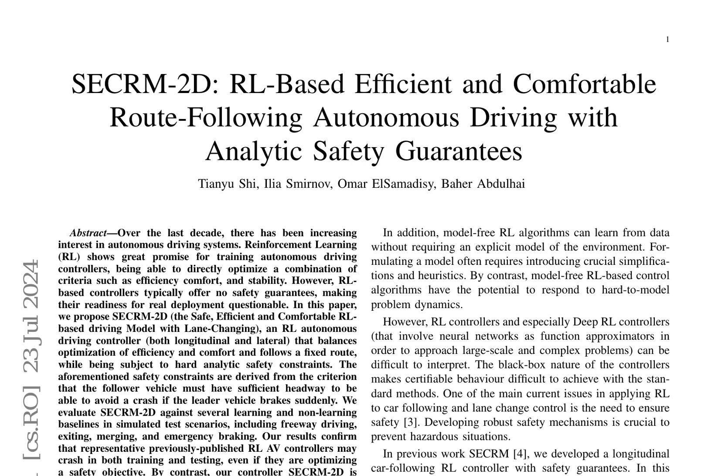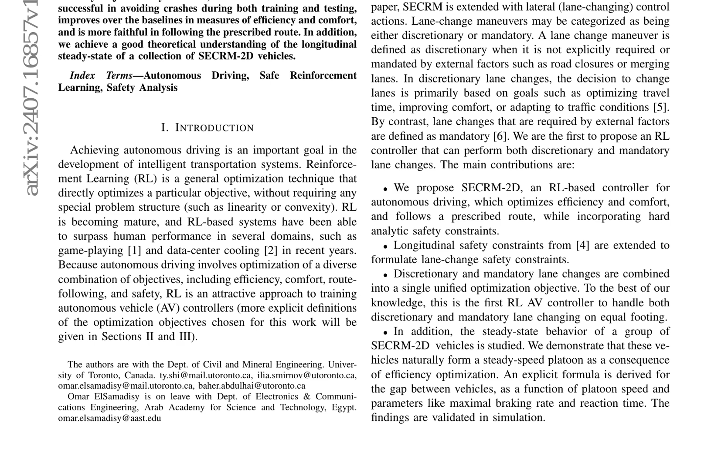Evaluations against several baselines in simulated scenarios confirm SECRM-2D's success in avoiding crashes, improving efficiency and comfort, and faithfully following the prescribed route. Furthermore, the study provides a theoretical understanding of the longitudinal steady-state behavior of a collection of SECRM-2D vehicles, demonstrating their ability to naturally form a steady-speed platoon. This advancement has significant implications for the development of safe and efficient autonomous vehicle systems.

Advancing the application of reinforcement learning to train performant autonomous vehicle controllers, this work incorporates strong, explainable, and explicit safety constraints. Existing research on lane change topics is reviewed, highlighting limitations in addressing safety issues.

The problem formulation involves training a controller for a single vehicle driving on a road with one or multiple lanes, acting in discrete time steps to set both continuous longitudinal acceleration and discrete lateral movement. The controlled vehicle obtains a fixed route from an independent routing module and performs discretionary and mandatory lane changes.

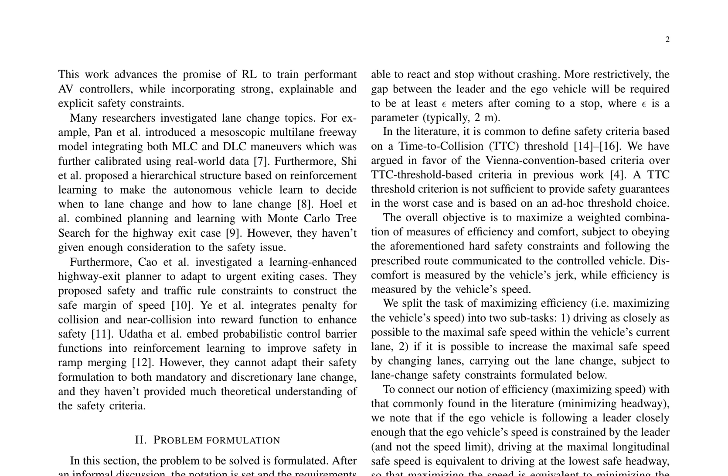Hard safety constraints, derived from the Vienna Convention on Road Traffic, ensure a minimum gap between the vehicle and its leader vehicle to prevent collisions. These constraints provide stronger safety guarantees compared to time-to-collision threshold-based criteria.

The objective is to maximize a weighted combination of efficiency and comfort measures, subject to obeying safety constraints and following the prescribed route. Efficiency is measured by the vehicle's speed, while discomfort is measured by the vehicle's jerk.

The task of maximizing efficiency is split into two subtasks: driving as closely as possible to the maximal safe speed within the current lane, and carrying out lane changes to increase the maximal safe speed, subject to lane change safety constraints. Notation is introduced, including the ego vehicle, leader and follower vehicles, distances, and acceleration and deceleration rates.

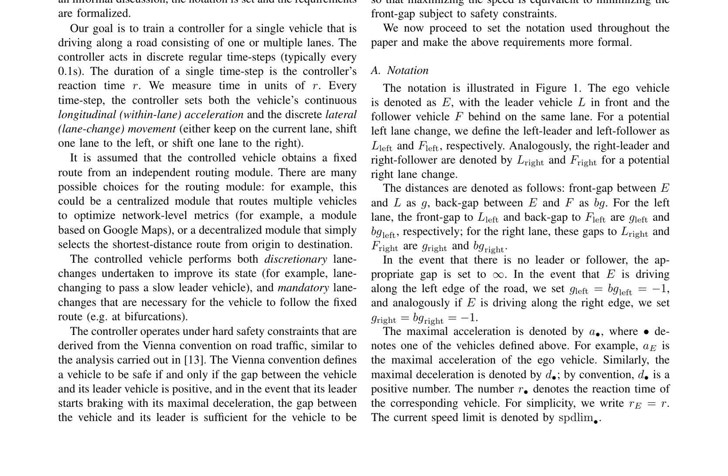The requirements and notation are formalized to provide a solid foundation for the remainder of the paper. The longitudinal safety constraint is formulated based on the ego vehicle's reaction time, minimal stopped gap, and speed, ensuring a safe front gap in the event of an emergency stop by the leader. This constraint is derived using the laws of kinematics, resulting in equation 1.

To avoid negative values, the defensive principle is adopted, assuming the ego vehicle's deceleration is less than or equal to the leader vehicle's deceleration. This leads to the ego vehicle's maximal safe speed at the next time step, given by equation 2. Similar expressions are derived for imaginary copies of the ego vehicle shifted one lane to the left or right, resulting in analogous expressions for maximal safe speeds.

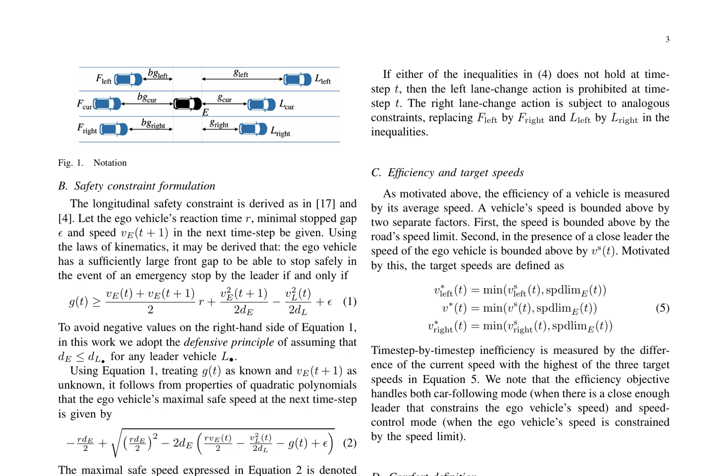The safety constraints for the SECRM-2D model are formulated, including the acceleration safety constraint, where the ego vehicle's speed must satisfy equation 3, and the lane change safety constraints, which prohibit lane changes that would violate the safe gap inequality. The lane change safety constraints are elaborated for a left lane change, resulting in two conditions given by equation 4.

The efficiency of a vehicle is measured by its average speed, which is bounded above by the road speed limit and the maximal safe speed. The target speeds are defined as the minimum of the maximal safe speed and the speed limit, given by equation 5. The inefficiency is measured by the difference between the current speed and the highest target speed.

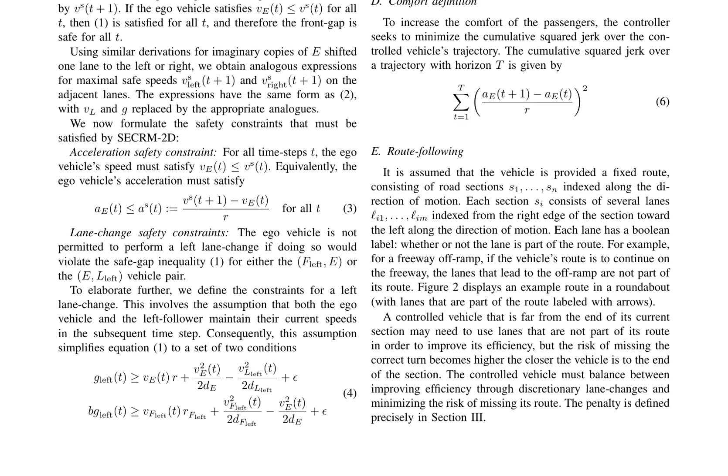The comfort of the passengers is increased by minimizing the cumulative squared jerk over the controlled vehicle's trajectory, given by equation 6. The authors formalize the control problem as an optimization problem within a statewise constrained Markov decision process, SCMDP.

Specifically, they define an SCMDP as a tuple consisting of the state space S, action space A, reward model R(S,A,S), transition model P(S,S,A), discount factor gamma, initial state distribution ρ(S), cost function C, and weights W.

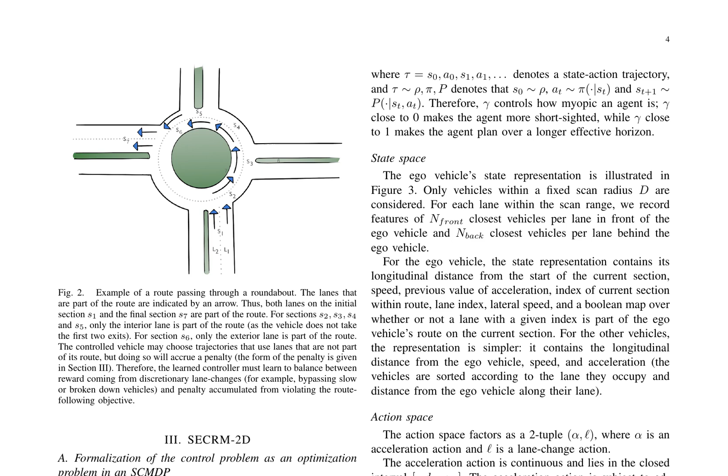The agent's objective is to find a feasible policy that maximizes the cumulative discounted reward J(pi) equals E, tau tilde rho pi, of the sum from t=0 to infinity of gamma^t times r(s_t, a_t), s_t+1.

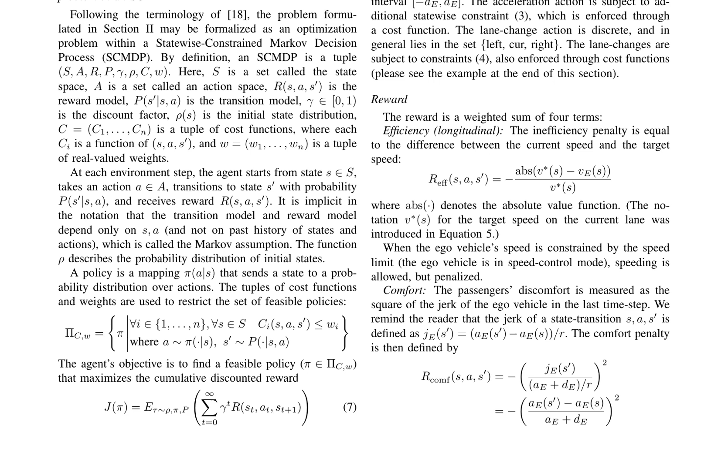The state space includes features of the ego vehicle and other vehicles within a fixed scan radius, while the action space is a two-tuple, alpha and L, where alpha is an acceleration action and L is a lane change action. The reward function is a weighted sum of efficiency, comfort, route following, and discretionary lane changes.

The state representation of the ego vehicle, as depicted in Figure 3, includes the ego vehicle and surrounding vehicles.

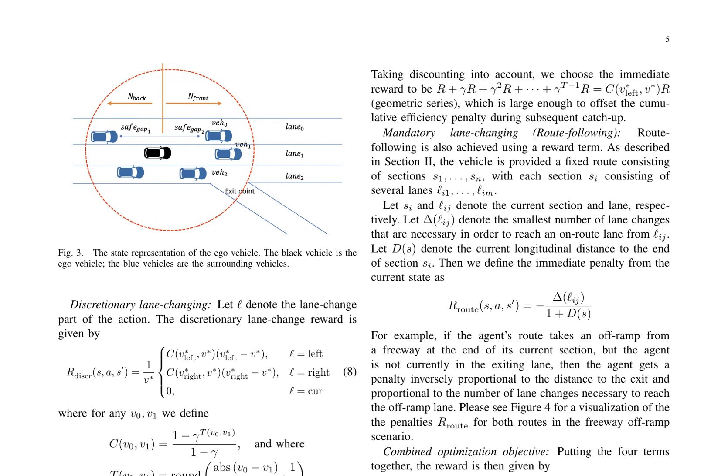A discretionary lane-changing reward is formulated to encourage changing to a lane with a higher target speed, penalizing changes to a lane with lower speed. This target speed maximization approach compactly encodes actions for various scenarios, including those with faster-moving leaders or no leaders on adjacent lanes. The immediate reward is boosted to compensate for the penalty accrued after the lane change.

Mandatory lane changing, or route following, is achieved through a reward term that penalizes deviations from the fixed route. The combined optimization objective integrates these terms with weights for comfort, discretionary lane changing, and route following. This unified approach optimizes both discretionary and mandatory lane change decisions, a novel contribution in the application of deep reinforcement learning to autonomous driving.

The Deep Deterministic Policy Gradient (DDPG) algorithm is employed to train the controller, where actions are encoded as pairs. The first component corresponds to acceleration, while the second corresponds to lane changes. To ensure safety, the acceleration action is constrained, and the lane change action is projected onto the available lane change space.

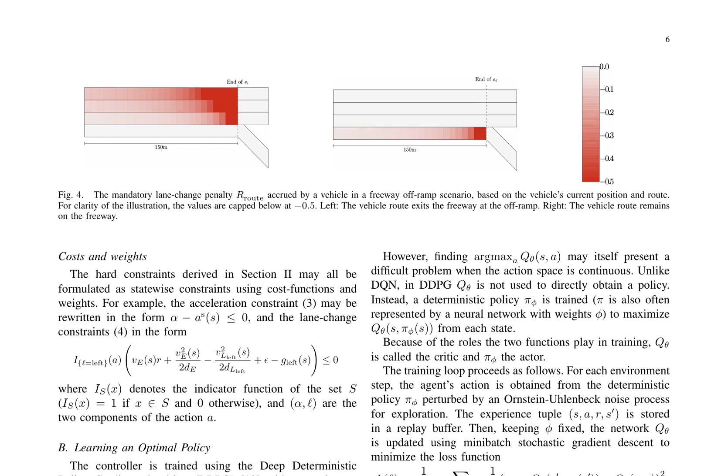The DDPG algorithm learns an optimal policy by iteratively updating the state action value function and the policy network. This process involves storing experiences in a replay buffer and updating the networks using mini-batch stochastic gradient descent. Target networks are utilized to enhance training stability.

Figure 5 illustrates the setup, demonstrating how the reinforcement learning vehicle determines acceleration and lane changes based on the current traffic environment. The RL vehicle's decision-making process is informed by its learned policy, which is the result of the DDPG algorithm's optimization of the state action value function and policy network.

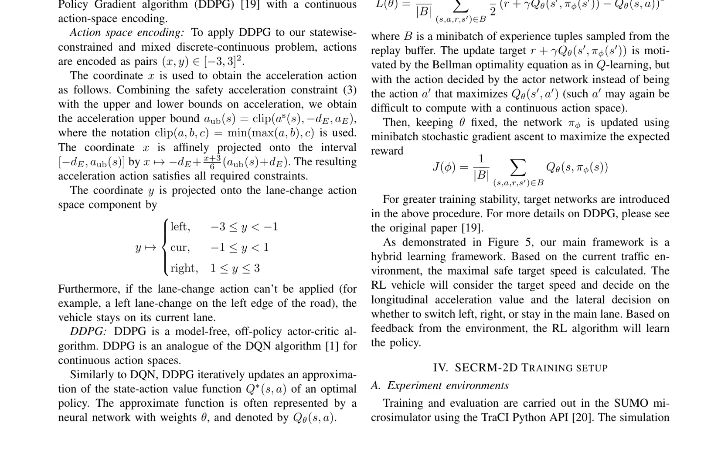This study evaluates the efficiency, comfort, and safety of an autonomous vehicle control algorithm in mixed traffic scenarios using deep deterministic policy gradients (DDPG). The algorithm optimizes vehicle control while enforcing constraints through action constraints rather than a safety term in the reward function.

Two environments are used: a simple loop network and a real-world network based on the Queen Elizabeth Way (QEW) and Erin Mills Parkway, Southdown Road interchange near Toronto, Canada. In both environments, the controlled vehicle learns to navigate through mixed traffic, optimizing efficiency, comfort, and discretionary lane changes while adhering to safety constraints.

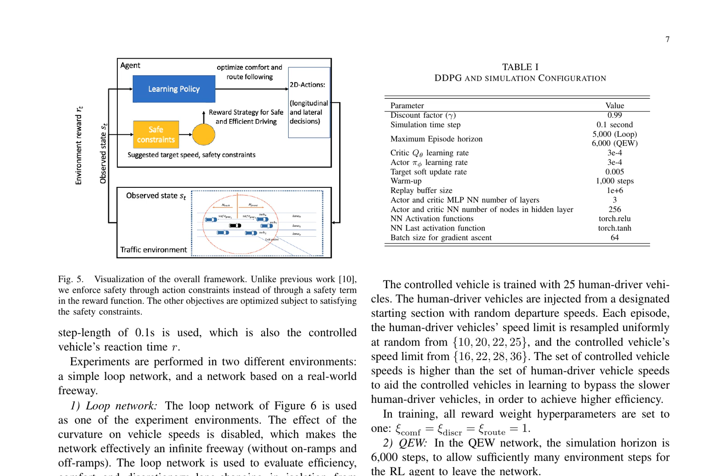In the loop network, the controlled vehicle is trained with 25 human driver vehicles, each with randomly sampled speed limits, to learn how to bypass slower vehicles and achieve higher efficiency. In the QEW network, uncontrolled vehicles are generated at a fixed inflow rate, and the controlled vehicle has two possible routes: staying on the freeway or taking the off-ramp, with each route assigned randomly with equal probability.

The DDPG model configuration consists of a discount factor of 0.99, a simulation time step of 0.1 seconds, and a replay buffer size of 1 million. The model features 3 layers of neural networks with 256 nodes in the hidden layers, and the actor and critic learning rates are set to 3e-4.

Target soft update rate is 0.005, and a batch size of 64 is used for gradient ascent. The model's activation functions are torch ReLU for the hidden layers and torch TANH for the last activation function.

Training was run for 1,000 episodes for each of the 5 randomly sampled seeds, and the checkpoint achieving the highest cumulative reward across the 5 seeds was selected for evaluation.

Figure 9 illustrates the convergence of efficiency and comfort rewards during training in the QEW network, displaying average values and 1 standard deviation across the 5 training runs.

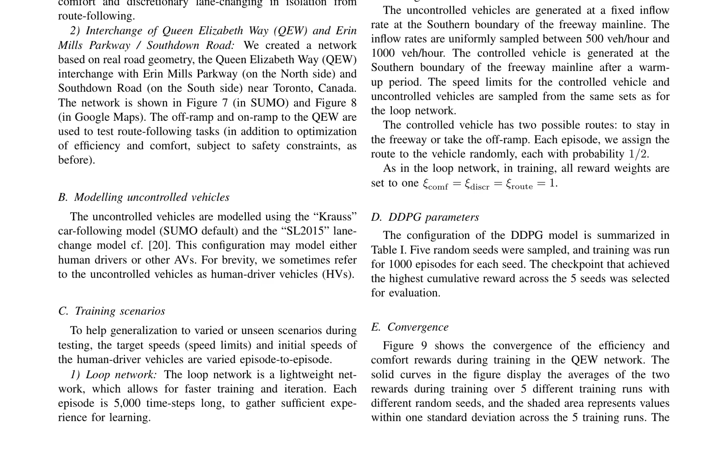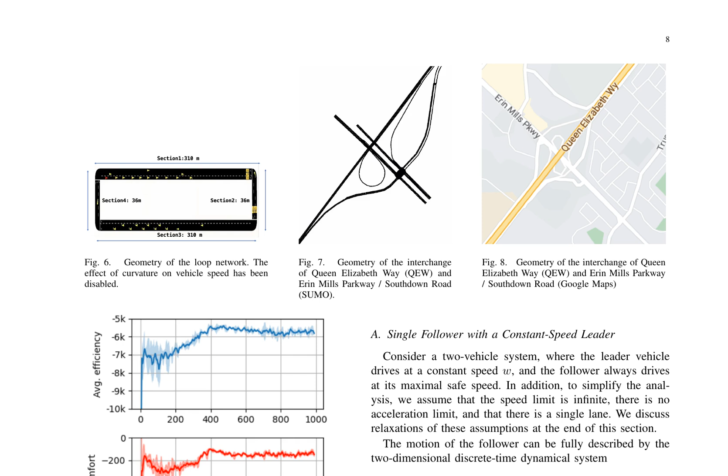This is evident from the analysis of the trained policy, where efficiency and comfort rewards converge during training, depicted in Fig. 9. In the long term, the longitudinal behavior of a collection of vehicles shows the formation of platoons at the same speed as the lead vehicle.

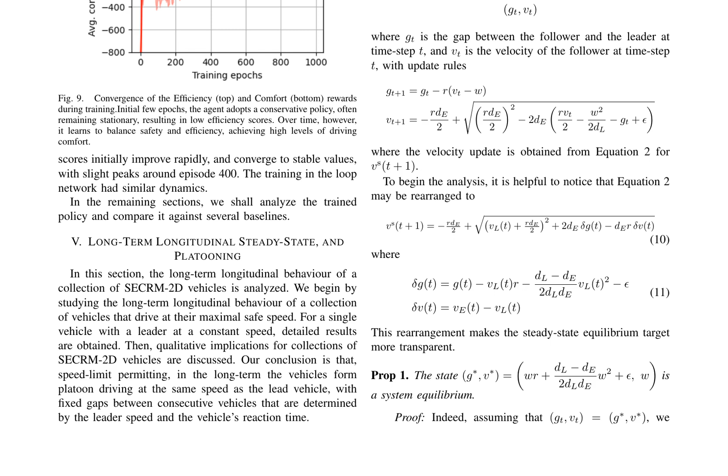The paper analyzes the asymptotic stability of the equilibrium point in a system where a follower vehicle is trying to catch up to a leader vehicle. The update functions for the follower's velocity and gap are provided, and the Jacobian matrix is computed at the equilibrium point. The eigenvalues of the Jacobian are shown to have norm less than 1 when the parameter W is greater than 0.

This indicates asymptotic stability. In the case where W is equal to 0, the eigenvalues are complex and have norm 1, making it impossible to conclude whether the equilibrium point is stable or not. However, empirical results suggest that the behavior is similar to the W greater than 0 case.

The paper then discusses how removing simplifying assumptions, such as bounded maximal acceleration in speed limits, affects the analysis. It is shown that with these assumptions removed, the follower may need an initial speedup period to catch up to the leader, and the analysis reduces to the previous case.

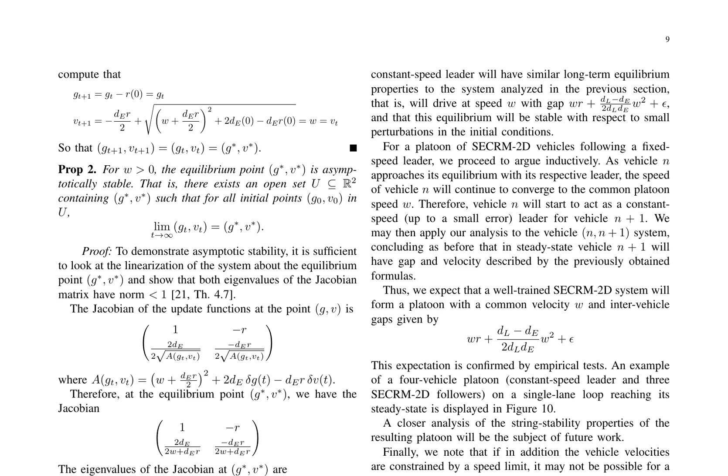The paper then moves on to discuss the implications of the analysis for SECRM-2D platoon formation. It is argued that a well-trained SECRM-2D model following a constant speed leader will have similar long-term equilibrium properties to the system analyzed, with the follower driving at speed W and maintaining a gap of WR plus DL minus DE over 2DLDE W2 plus epsilon.

For a platoon of SECRM-2D vehicles following a fixed-speed leader, it is argued inductively that each vehicle will converge to the common platoon speed W, and the intervehicle gaps will be described by the previously obtained formulas. Empirical tests confirm this expectation.

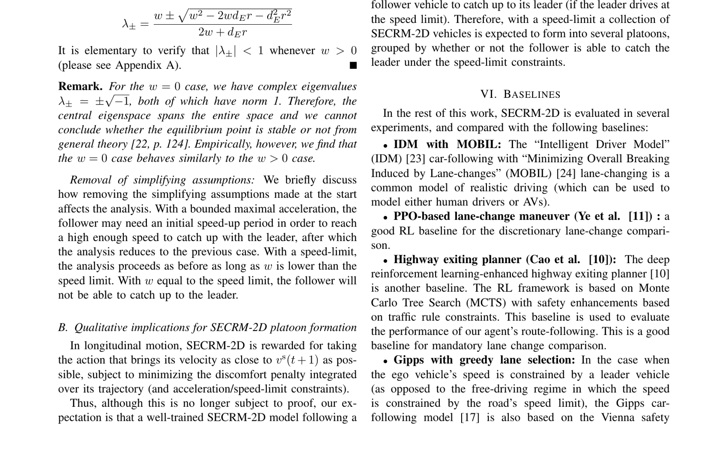Finally, the paper notes that if vehicle velocities are constrained by a speed limit, it may not be possible for a follower vehicle to catch up to its leader, and a collection of SECRM-2D vehicles may form into several platoons. The paper concludes by outlining the baselines used to evaluate the performance of SECRM-2D in subsequent experiments.

The authors evaluate the SECRM-2D controller in a loop network under 3 scenarios: normal driving, congested traffic, and emergency braking. Performance is compared to 3 baselines: IDM plus MOBIL, Gipps plus greedy, and PPO-based reinforcement learning.

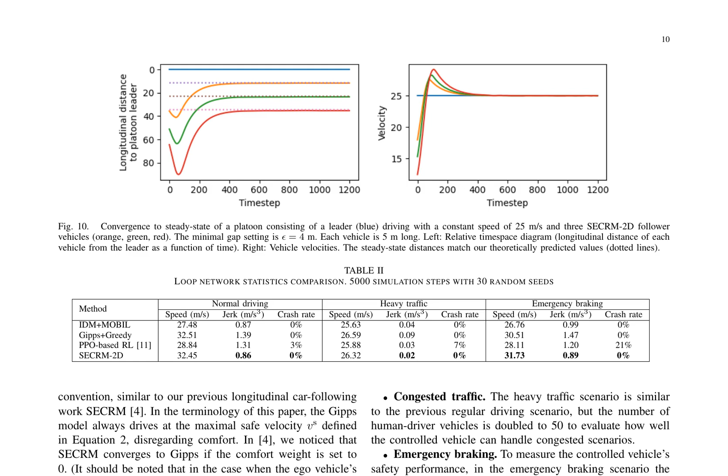In the congested traffic scenario, the differences between methods are minimal due to the high number of vehicles. The emergency braking scenario demonstrates SECRM-2D's ability to generalize well and maintain safety under unexpected events.

The Gipps model is extended with a lane-changing model, resulting in Gipps plus greedy, which prioritizes efficiency over comfort. The authors conjecture that SECRM-2D converges to Gipps plus greedy as the comfort weight Xi-comf approaches 0, suggesting SECRM-2D can be seen as a more comfortable version of Gipps plus greedy.

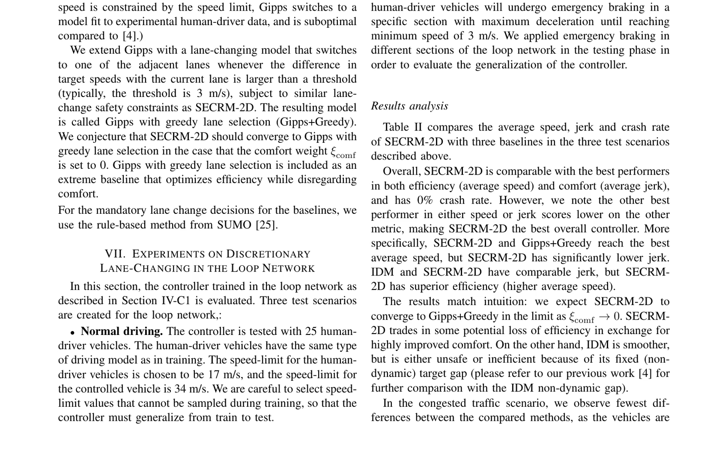This highlights SECRM-2D's ability to balance efficiency and comfort, making it a promising approach for autonomous vehicle control. The SECRM-2D vehicle's performance is evaluated in various scenarios within the QEW network, including bypassing, emergency braking, and merging tasks.

In the bypassing scenario, the controlled vehicle navigates through a zigzag fleet of human-driven vehicles with a lower speed limit, demonstrating its ability to conduct safe, efficient, and comfortable lane changes.

In the emergency braking scenario, the controlled vehicle must brake to avoid collisions when encountering sudden deceleration from leading human-driven vehicles.

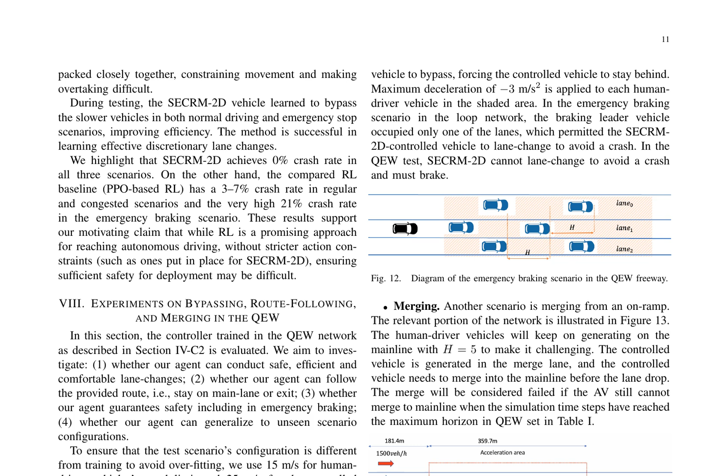The merging scenario tests the vehicle's capacity to merge into the main line from an on-ramp under challenging conditions. The results of these experiments are analyzed and compared to two baseline models, IDM plus MOBIL and Gipps plus greedy.

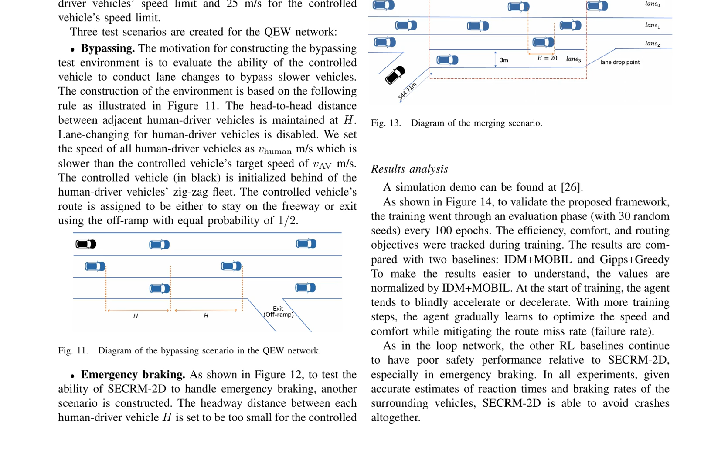Over the course of training, the SECRM-2D agent improves its efficiency, comfort, and routing objectives while reducing the route miss rate. Unlike other RL baselines, SECRM-2D achieves a zero crash rate in all scenarios, particularly in emergency braking, thanks to accurate estimates of reaction times and braking rates of surrounding vehicles.

The SECRM-2D model, a safe, efficient, and comfortable reinforcement learning-based driving model with lane-changing capabilities, was tested in various scenarios to evaluate its performance. In the bypassing scenario, SECRM-2D generalizes well, achieving higher average speed, lower jerk, and better safety and route following performance compared to rule-based and RL-based controllers.

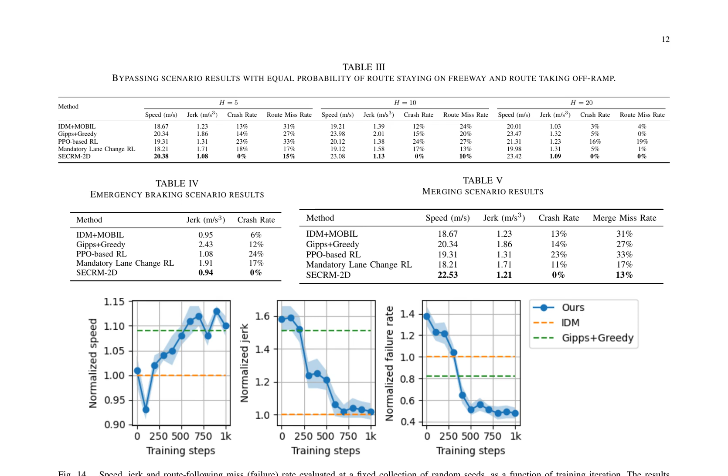As the headway decreases, travel efficiency decreases, demonstrating its adaptability in different traffic conditions. In the emergency braking scenario, SECRM-2D maintains low average jerk and zero crash rate, showcasing its superior safety performance.

The merging scenario results, obtained without retraining the controller, illustrate the model's ability to generalize to different route-following scenarios successfully. The efficiency and comfort of the model depend on the reaction times of the controlled and human driver vehicles in

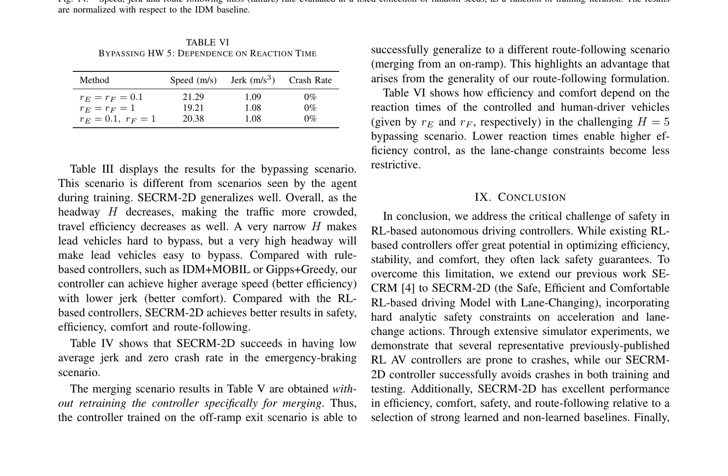the challenging bypassing scenario, with lower reaction times enabling higher efficiency control. The SECRM-2D controller successfully avoids crashes in both training and testing, outperforming several representative previously published RLAV controllers.

In the realm of microscopic traffic simulation, car-following models play a vital role in replicating real-world traffic conditions. However, existing models often fall short in capturing the complexities of vehicle behavior, particularly when it comes to lane changes.

To address this limitation, we propose the SECRM-2D model, which integrates both mandatory and discretionary lane changes using deep reinforcement learning. By leveraging a two-dimensional state space, SECRM-2D can accurately capture the dynamics between vehicle speed and intervehicle gaps, providing a more realistic representation of traffic conditions.

The SECRM-2D model's development is rooted in the concept of deep reinforcement learning, allowing for the optimization of vehicle control strategies through trial and error. We evaluate the model's performance using the SUMO microscopic traffic simulator and compare it to other state-of-the-art models.

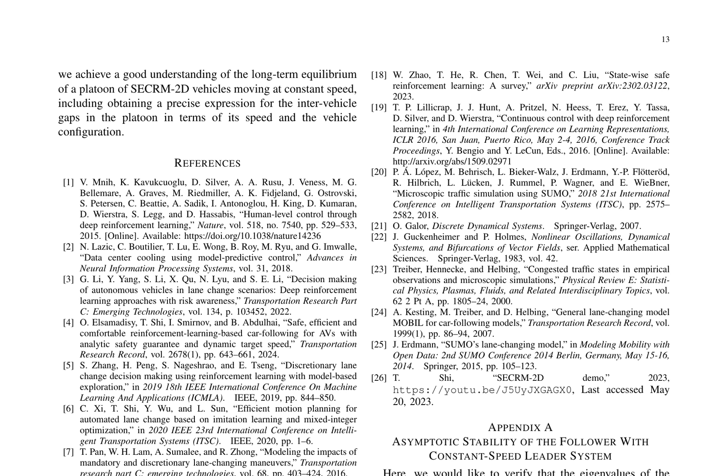Our analysis reveals that SECRM-2D achieves stable and efficient vehicle spacing, even when considering both mandatory and discretionary lane changes. We further investigate the long-term equilibrium of a platoon of SECRM-2D vehicles moving at constant speed, deriving a precise expression for intervehicle gaps in terms of speed and vehicle configuration.

This analysis demonstrates the model's ability to maintain stable and efficient vehicle spacing. Additionally, we verify the asymptotic stability of the follower with a constant speed leader system, ensuring that the eigenvalues of the Jacobian matrix at the equilibrium point satisfy lambda plus or minus less than 1 whenever W greater than 0.

The SECRM-2D model offers a significant advancement in the field of car-following models, providing a more realistic and efficient approach to microscopic traffic simulation. Its potential applications include enhancing the realism of traffic simulations and improving the efficiency and safety of automated vehicle control strategies.

Future research directions include incorporating additional factors like weather conditions and pedestrian behavior into the model, further refining its ability to replicate real-world traffic conditions.

Case B, where W squared minus 2WDR minus D squared R squared less than 0 is considered. In this scenario, the eigenvalues lambda plus or minus are complex conjugates. To establish stability, it suffices to show that either of the eigenvalues has a norm less than 1, since complex conjugation preserves norms.